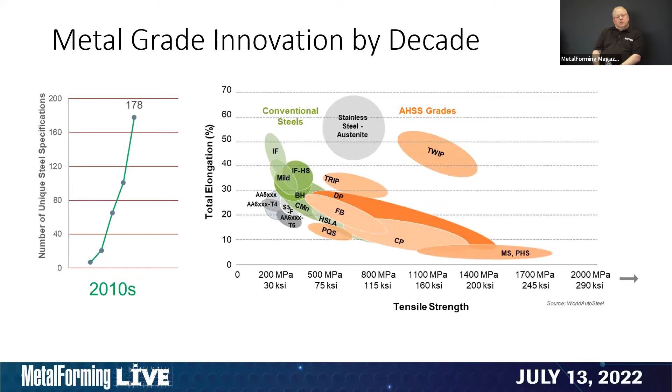You're seeing greater usage of aluminum alloys, the 5000 and 6000 series of aluminum alloys, again in automotive applications. And today, we have now the commercialization of the third generation high strength steels with enhanced strength and ductility options. You see that there are more than 200 different unique steel specifications.

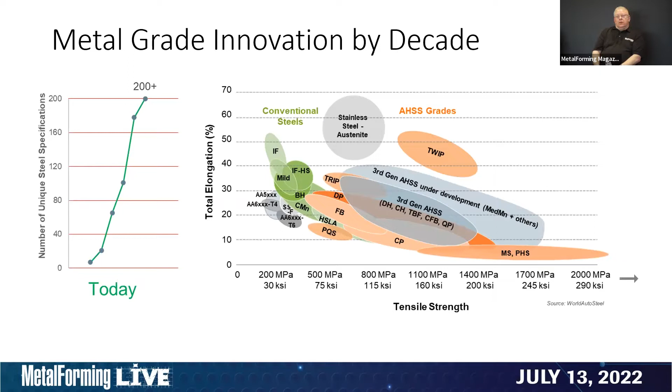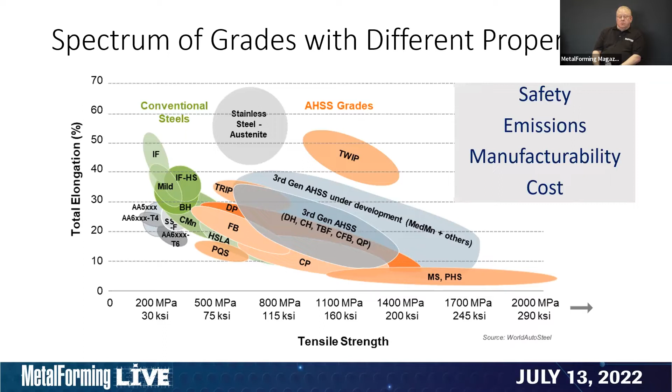What's the rationale to choose from one grade versus another? Well, primarily, no matter the industry, it comes down to 4 categories: safety, emissions, manufacturability, and of course, cost.

I want to touch on the primary difference between conventional steels - the mild steels, the high strength low alloy steels. I'm grouping those into conventional grades that many of you have had years of experience working with. First, these grades are absolutely globally available, but steel makers around the world more or less use the same chemistry and the same mill processing recipe to get these grades. Well, that's really the definition of something that's a commodity.

You can swap between suppliers and there'd be subtle differences. There probably are some differences between suppliers, but for the most part, the properties are going to be the same because steel makers around the world use the same general approach to hit the mild steels and the conventional high strength steels, which do include the HSLA grades.

The biggest difference with advanced high strength steels is that the steel makers are constrained by the equipment they have. There are specifications for advanced high strength steels that have fairly large windows of yield strength, tensile strength range, elongation, and n-value, the important properties for forming and formability. But the windows are pretty large, and that lets the steel maker optimize their mill processing and chemistry to their equipment to achieve those property ranges. So you'll have steel makers from around the world hitting the wide property ranges that are allowed, but they're going to take up different portions of each of those windows. That's one of the biggest differences with advanced high strength steels.

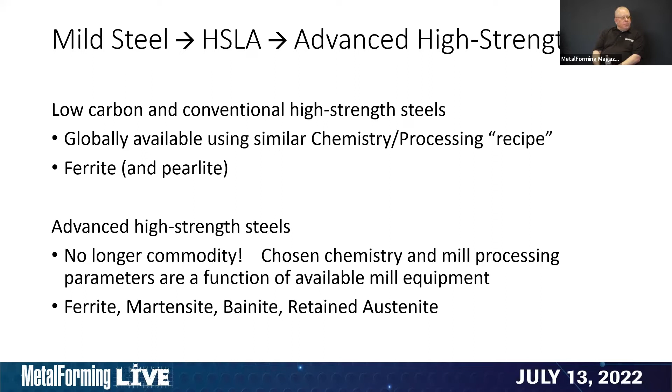For dual phase and trip steels, they are typically applied on parts that will benefit from deep drawing capabilities. They've got some draw depth to them, but we also need the high strength. The dual phase steels, shockingly, maybe according to the name, have two phases: ferrite and martensite. In dual phase steels, their hardnesses are dramatically different. Ferrite is super soft, martensite is super hard. And that is one of the things that leads to very good elongation or ductility for the strength level.

Along with that comes very high n-value for both dual phase and trip steels. And where that is really useful is that those properties do wind up on metal certs. We get them from a simple tensile test. So they're on the metal certs and they're key inputs into forming simulation software. Over the years, simulation packages have developed and advanced where, when we're talking about drawn parts, they predict formability exceedingly well. So for dual phase and trip steels, that isn't a problem.

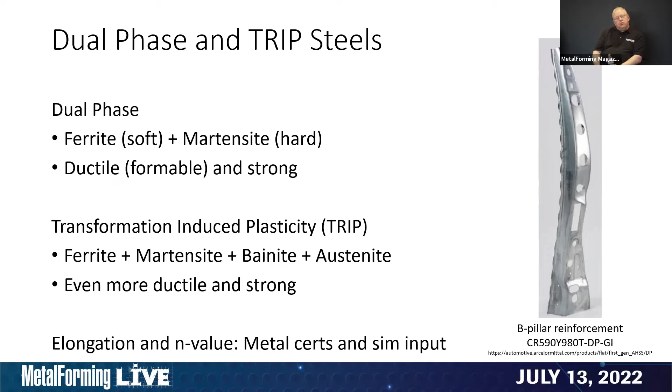There's another common, increasingly used type of advanced high strength steel known as complex phase steels. We've got some examples shown on the screen now, and you see they're really not deep drawn parts. What makes these parts unique, where the features and characteristics of complex phase steels are best used, is that we have a cut edge that is expanded. So complex phase steels have really good sheared edge expandability for their strength levels, substantially better actually than dual phase and trip steels.

The reason for that is, well, from the name, complex phase, there's combinations of every metallurgical phase in there, depending on the strength level and the steel maker. But the ferrite, which in dual phase and trip steels is super soft, steel makers have figured out a way to make actually much harder. So what we have in complex phase steels is a microstructure of more uniform hardness. That leads to higher yield strength at a given tensile strength, but it also helps when trying to expand cut edges. As shown with the examples on the screen now, complex phase steels are best applied to parts that have cut edges that are expanded.

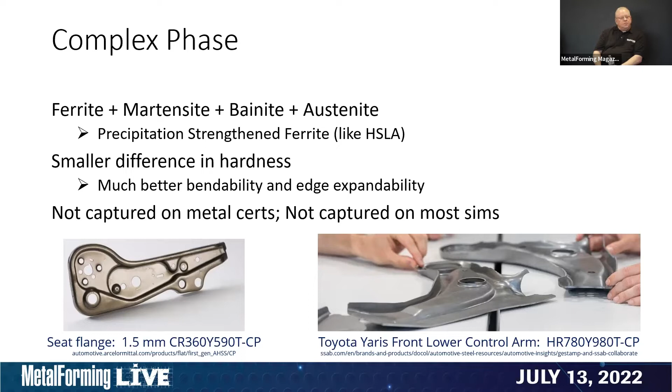You've probably heard of the old rule of thumb: 10% clearance between the punch and the die. Well, that doesn't always apply anymore. 10% may have been great for mild steels, but for advanced high strength steels, it's not always the best.

Another example compares dual phase 780, DP780, a dual phase steel with 780 megapascal tensile strength. This is taken from 6 suppliers from around the world. DP780 is not the same everywhere—there are different types of DP780 available. As I mentioned earlier, they're made differently within the steel mill, so the recipe is going to be different.

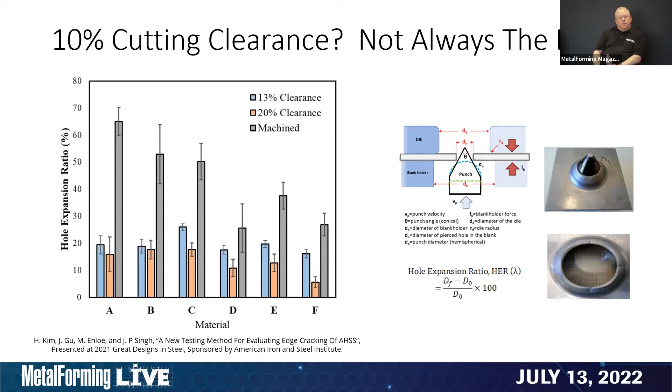The vertical scale on the left ranges from the low end of about 25% up to as high as 65%. That's for a 780 megapascal strength material, about 120 KSI. For a complex phase steel of substantially higher strength, we're not in the 25 to 65% range, even with a sub-optimized cutting clearance—we start off at 60 and can make it as great as over 100% expandability. That has to do with the microstructure, in spite of it being substantially higher in strength.

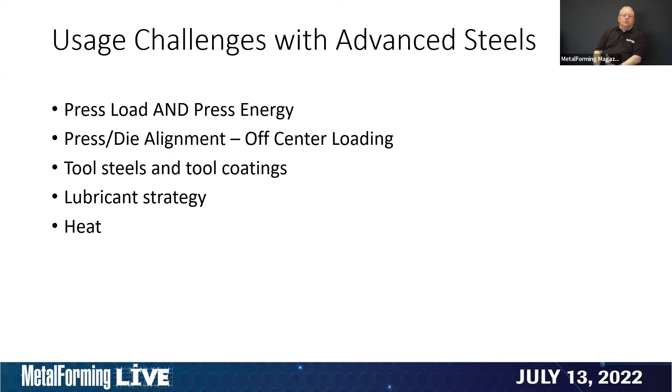With advanced high strength steel, some of the challenges you're undoubtedly facing are press load and press energy issues, tooling alignment, tool steels and coatings, lubricant strategy, and heat buildup. We'll discuss some of these in our roundtable, but the bulk of these issues comes down to two things: we're working with steels of substantially higher strength than 10 to 15 years ago, and the microstructure is unique to each specific steel grade.

But it's not just steels presenting us with challenges—aluminum alloys also present their own unique challenges. Primarily for metal stamping, we're talking about the 5000 series and 6000 series aluminum alloys. We're now starting to see usage of 7000 series aluminum, but room temperature stamping doesn't really succeed with it. For that, we need warm forming or hot forming to make the best use of the 7000 series, which gives the highest strength aluminum alloys.

If you're doing any aluminum stamping, the biggest thing to take away in terms of cost savings is you must segregate your scrap. Users of steel have gotten spoiled over the years—no matter the grade, let it all fall into the scrap chute, into a big hopper, and all your scrap, no matter the alloy, can be intermingled, returned to your scrap partner, and they'll be able to recycle it. No issues, no concerns, no loss of properties.

With aluminum, the alloying elements that make the 5000 series unique from the 6000 series, unique from the 7000 series—the elements that give each alloy its unique properties—can't be intermingled. If you do, you'll wind up with a paperweight and significantly degrade the value of your scrap. As a matter of fact, Ford, when they first introduced the F-150 in the 2015 model year, installed a $60 million scrap segregation unit where they were able to keep the scrap stream from each part unique and return it back to its specific mill source.

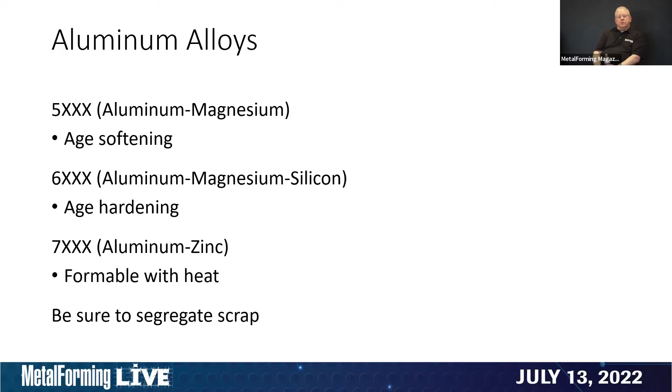That is possibly the most significant factor that allowed Ford to use aluminum alloys in a profitable manner—they wouldn't have been able to do so otherwise. As far as usage goes, there's something about aluminum alloys that actually isn't aluminum. That characteristic is why aluminum doesn't rust, it's also one of the reasons aluminum is really difficult to weld, and why your tooling might have issues with aluminum.

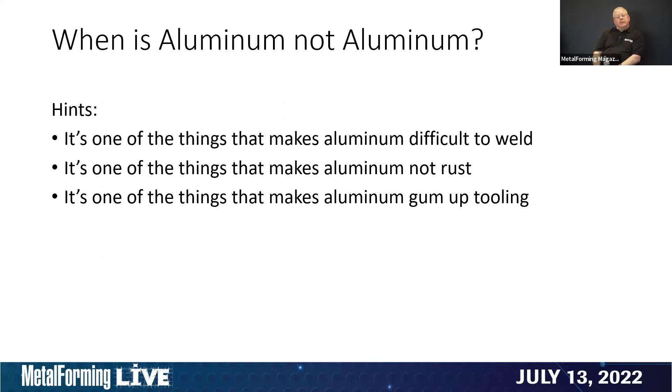That is because of a sub-microscopically thick layer that is on the top of every sheet aluminum product that you buy. It's a layer of aluminum oxide. That aluminum oxide protects the surface from rusting, but aluminum oxide melts at a significantly higher temperature than steel, and it's a much higher temperature than aluminum.

We need to break through that aluminum oxide when we weld. But aluminum oxide, that's on the surface of every sheet aluminum alloy that's out there. Aluminum oxide is also what makes up grinding wheels and sandpaper, which is why aluminum is such a bear on your tools. Nothing we're going to be able to do about that, but knowing that allows us to put in some countermeasures. There's a lot of successful sheet aluminum stamping throughout the world today.

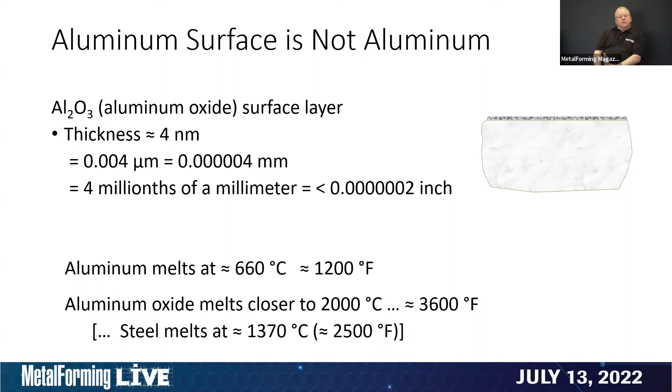Let's go to the why would we want to spend for one supplier when we can get something cheaper. Just remember, they're going to have different characteristics. That same thing applies to the advanced high strength steels. Be careful when you switch suppliers.

Inserting draw dies for maintenance and wear, mainly the binder and the cavity, to protect the draw beads against wear. And also implementing stake beads to aid in reducing curl and spring back as required by the part geometry, the hat section and steep walls, for example. The stake beads play a major role in reducing that curl and spring back.

Steve, one question on your first point about balancing operations. Not only do you need to balance within the die itself, but from station to station on a transfer press or a production press, isn't it also more important to balance those loads out and get them centered up under the press ram? Yeah, absolutely, for sure. That ensures long-term lasting of the press itself. If you have three dies on a single slide and you have the draw die on one side, you need to offset that tonnage on the other side of the press. So you'd add cylinders, let's say, to the third operation to take up some of that offset tonnage.

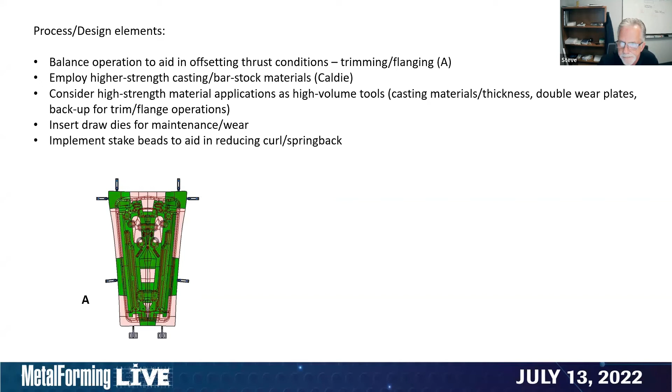On the inserts, I've seen some examples where usually it's advised that those inserts are coated with some type of hard coating. I've seen that, of course, there are different options for the ways the coating can be applied: thermal diffusion, chemical vapor deposition, and physical vapor deposition, or PVD. I've seen good practice evolve to use PVD because that results in the least distortion of the tools. Chemical vapor deposition and thermal diffusion are both higher temperature applications. But that's just what I've seen and read. I don't know if that's something you've got some direct experience in.

I'd like to comment on that. So when we're looking at inserts on tooling, especially for these high strength applications, especially if you're running in progressive dies where you have a lot more vibration and heat that's being generated, we're looking for tools that are going to be wear resistant and have adequate toughness, and in most cases require a coating. So that's going to change our approach to our traditional view of tool steels.

In these instances, you're going to be wanting to look at high-speed tool steels or powdered metallurgy PM tool steels, because these tool steels temper at a much higher temperature than A2 and D2 that we're typically used to working with. And this is what's going to fall in line with the PVD coatings, because these PVD coatings are applied at around 900, 950 degrees Fahrenheit, which is below the tempering temperature. Now, if you use an A2 or a D2, which tempers at like 550 degrees Fahrenheit, when you apply the PVD coating, it's actually going to make the tool softer. So tool steel selection becomes really important when we're looking at inserting dies for high strength applications.

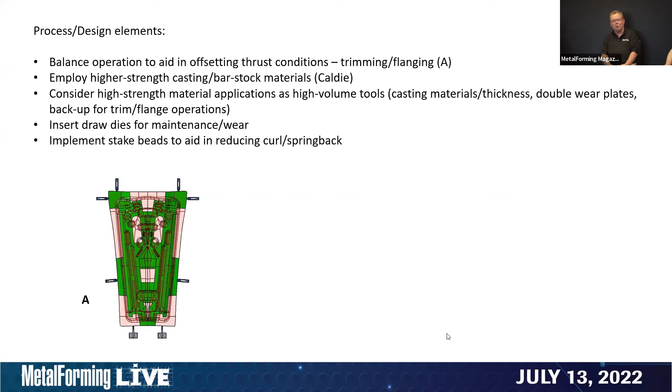Yeah, and on that subject, Steve, is there, as you migrate up to higher strength tool steels, does that take you out of the cast world, where a lot of conventional steels are cast? Do you have to go with bar stock? As far as the inserts, is that what you're asking? No, for let's say for a trim steel or something, can you get a cast Caldie trim steel? Yeah, you can get there. There's still a cost hit between conventional casting and cast Caldie, but you can get cast Carmo, and there are definitely different material options for those that are increased strength over typical gray iron casting, for instance.

Good. Thank you. Steve, I know you had a little bit more to share with us on spring back, and as your last bullet point there, you want to talk a little bit more about managing spring back?

Sure. Yeah, so this is an example of the introduction of a stake bead in a draw operation. This has helped us considerably reduce curl and spring back in some of these higher strength parts. In the screenshot you see on the left, that's the draw off bottom. You can see the conventional bead geometry in the, let's say, the downward direction. And then just to the left of that is the introduction of a stake bead.

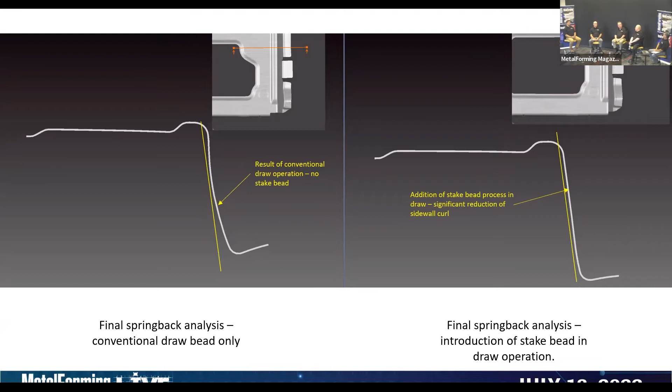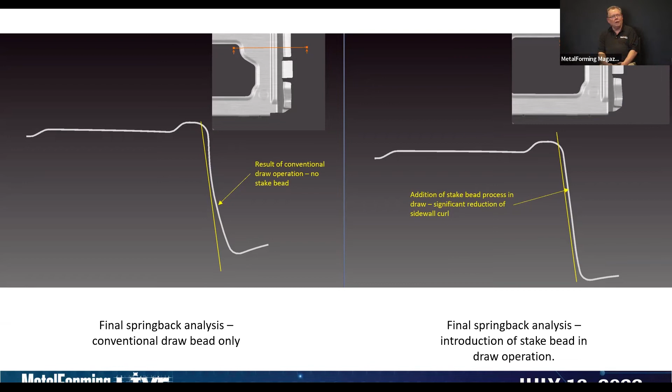I know that some of the tools we've been running with 980 Gen 3 and 1180 Gen 3 have been very successful using the stake bead. You showed in the previous slide a three-piece tool. Can you do this most of the time with a three-piece, or do you have to go to a four-piece sometimes?

Occasionally you'll have to go to a 4-piece, it's geometry dependent. For the most part, we've been implementing this in conventional 3-piece stretch draws, but you could use this in a 4-piece.

Steve, may I have a quick question? Go ahead, Eren. I was going to ask about the material card you were using, and I also saw there's a question. What kind of material card were you using in AutoForm with this one? Was that through a supplier, a steel supplier, or an OEM, or did you do it yourself? This particular example was from the steel supplier.

Especially for springback analysis, and in hand with the question we received from Mr. Ajay Gupta, you need to take into account the kinematic hardening, which is very hard experimentally to get that data. It's not impossible, we do that, but it takes a long time, because without that implementation you have a lot of bending, unbending, rebending, unbending, and rebending. It's very hard to predict and correlate that with reality without taking that material data into the material cards.

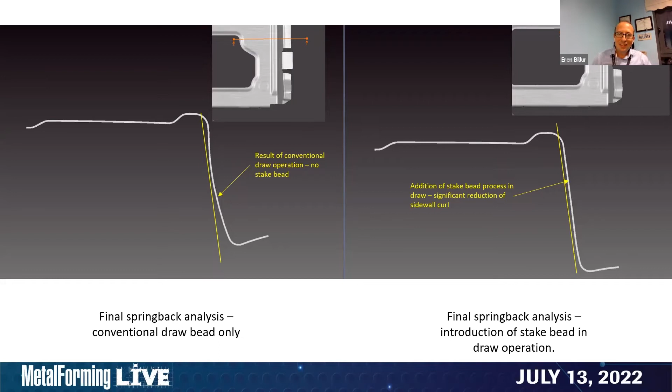So if it's correlating very well, I can guess which steel mill you got this data from. Okay, there's a question online: is the wall curl simulation — I guess this is for Steve or Mike — considering the kinematic hardening model? I don't know, is that for you, Steve, maybe? Yeah, in this case it is, yes.

Good, thank you. Okay, can you go back one slide? I can see on the previous slide, one of the downsides to using a stake bead approach is that you're going to need a slightly larger blank so you can get enough real estate to have both your draw bead and the stake bead. Are there other downsides or challenges users should be aware of when they go to a stake bead approach to minimize springback?

Yeah, it adds to the complexity of the die. Obviously when you introduce the stake bead, you're introducing that additional detail. Typically when we have a stake bead process like this, in order to be able to tune this in, you might go 5 millimeters, you might go 5.5 millimeters. It depends on where you get in tryout.

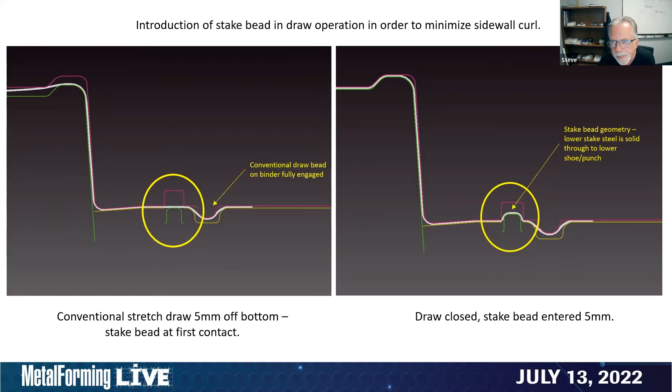Okay, good. We have a question online I want to address before we get too far in. The question is: how can you best explain the difference in HER for a complex phase steel at a 10% clearance versus 15% clearance? Is this a relatively small difference in breakage for that outcome? I don't know, best to... that HER is the hole expansion ratio, if I may.

Go back to your— yeah, if we can go back to the slides, please. We anticipated this, right? Let's see how well we can do all sorts of things technically, but put us in front of some technological issues here. All right.

So the question was related to hole expansion ratio, or HER. That's on the vertical axis. And the difference between why 10% clearance isn't optimized, I believe a lot of it has to do with the work hardening, the damage that's put on the edges when the material is cut in the first place. You're changing the ratio of rollover, burnish, fracture, and with 15%, for these higher strength grades, you might be doing less damage.

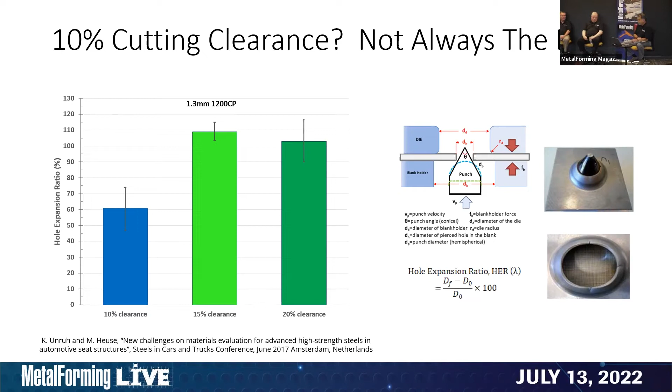Good, I want to go back to the stake bead. So we just have a general comment on stake beads, and you may or may not have further comment, or agree or disagree. The person in the audience says the stake bead needs to be on the punch, inside the punch opening line and outside the trim line. Is that right? Steve, you want to answer that one? Yeah, that's true, it needs to be inside the punch opening and also the trim line. I mean, it's all out on the addenda.

All right, so a general question. All of you guys could probably answer this one. Maybe Pete, you could start on the difference between elongation and n-value.

I think that's maybe more mine. Is that you? Okay, that is maybe mine. They absolutely trend in the same direction, but there is absolutely no correlation between the two. Or there is a correlation, but it's not a good one. So it is...

From the way the steel hardens, that's why if you just get a YTE - yield, tensile, and elongation - you can't plug that into your simulation and hope to get accurate results. N value is a critical component of sheet metal formability, at least for steel. It's actually not as strong of a driver when it comes to sheet aluminum alloys. But N value is a standalone separate parameter that tracks with elongation, but not well enough where you could just use elongation as a substitute.